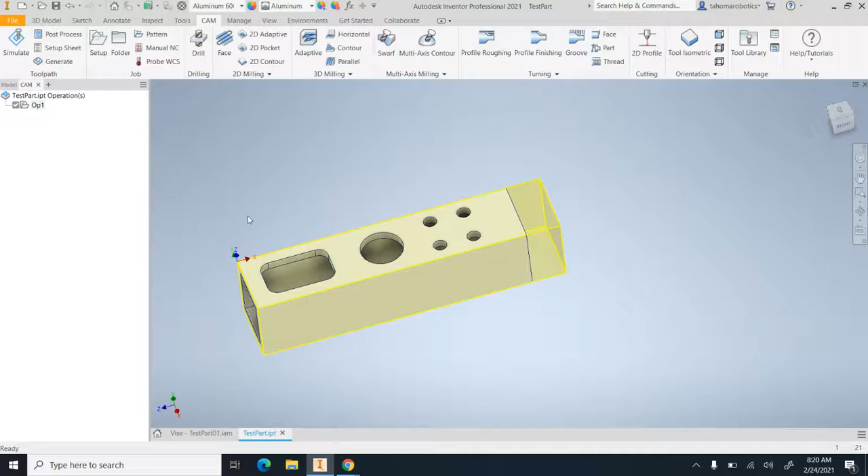In the previous video, I went over how to set up the work coordinate system for this test part that we machined in class, or that I demonstrated for you being machined in class. And so we have the origin here and the x-axis along this side of the piece, the y-axis going back here, and then the z-axis going up there.

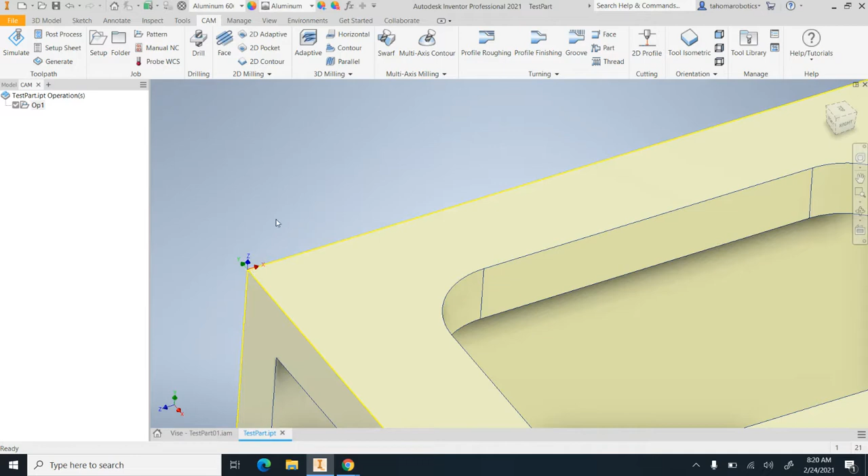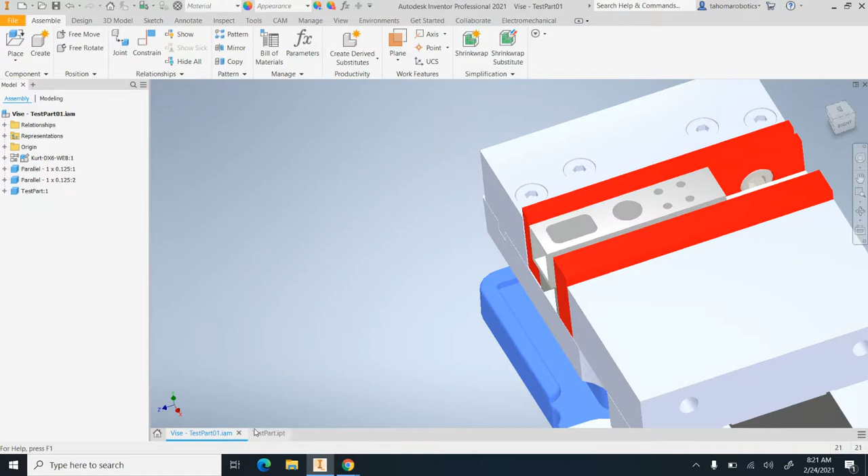Setting up the work coordinate system is the first step before moving on to the actual creation of the tool paths for machining. So now that we have the part held in the vise, as shown here, as you saw in my demonstration, the machine comes down and cuts these different features on the test part here. The features that we have are just this little rectangle with filleted corners, this circle here, and then these holes here.

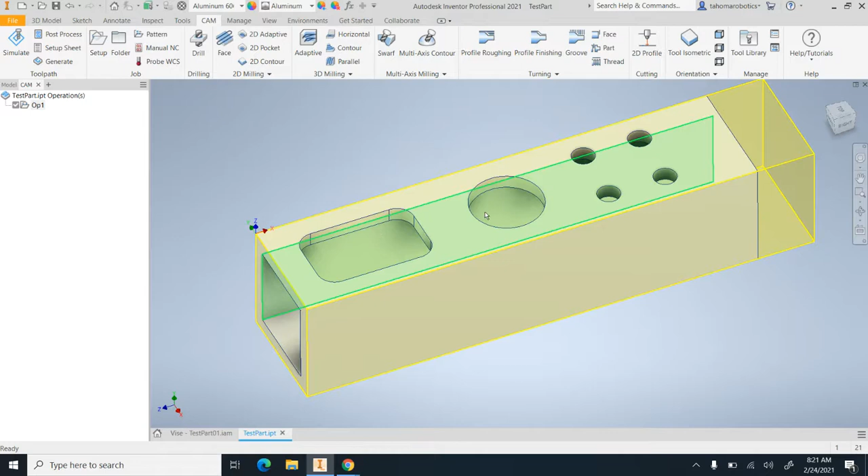The larger features, the rectangle and the larger hole, or the circular hole, will be actually machined out with a smaller cutter, a 1/4 inch flat end mill that we're going to use, and that's what I had done in class. And then these holes are going to be drilled. Often when you see smaller holes like this in the design in the class, they're for fasteners like rivets and screws. You can always check within Inventor to see the size.

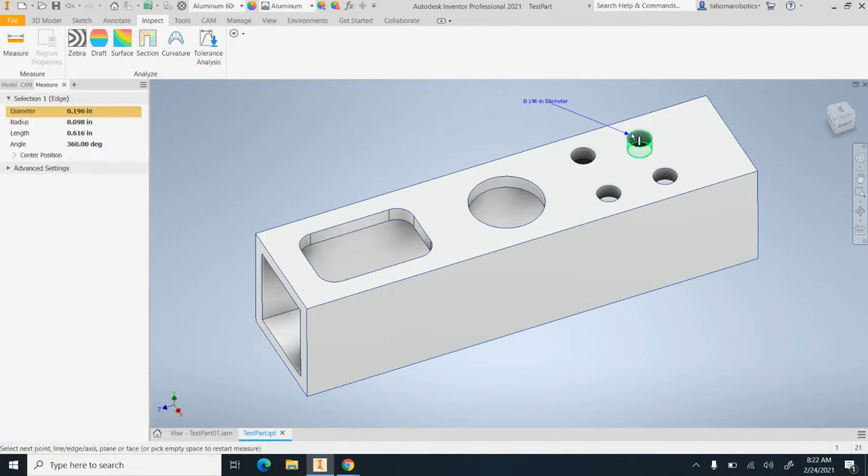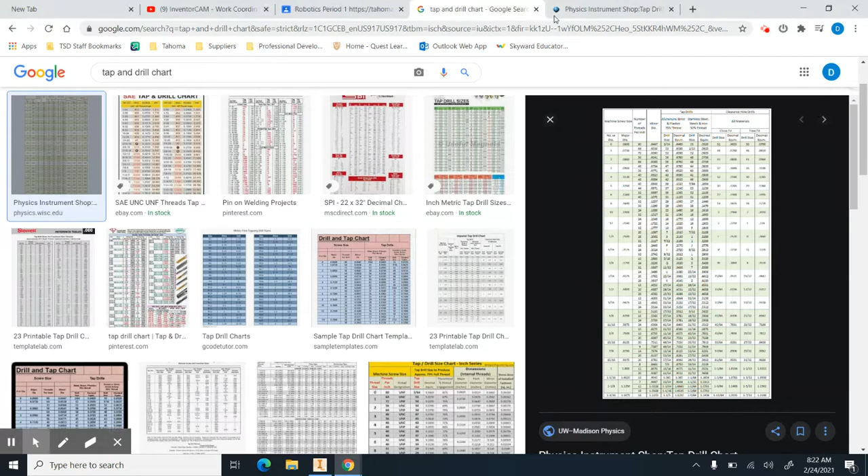So if we go inspect and measure, you can click here and see the diameter. The 0.196 diameter is a very popular size that we use within the shop because it is the size for a number 10 screw. It's a clearance hole. Looking at the tap and drill chart, if we look at a close fit clearance hole for a number 10 screw, it uses a number 9 drill bit, which has a diameter of 0.196. So that 0.196 is a common hole size that we use.

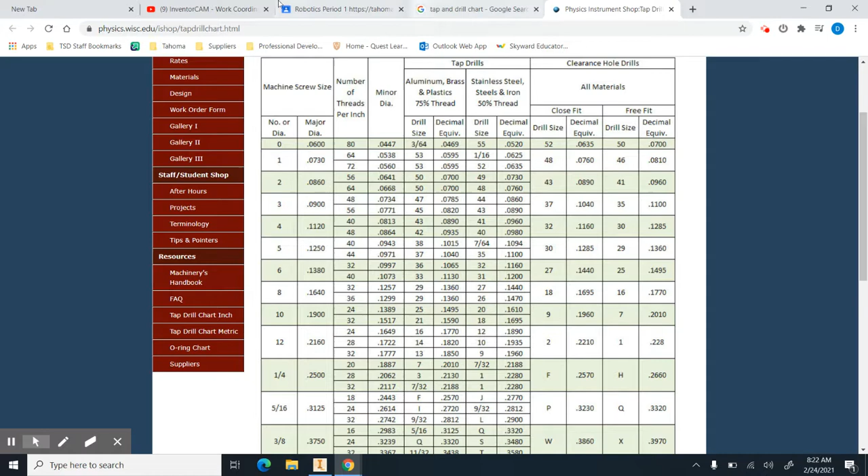It's so common that we have a drill bit in the machine dedicated for that hole size. Whereas these two features will not be drilled, they will be machined with, like I said, a 1/4 inch end mill that will cut away the material. So going back to the CAM tab here, we have our work coordinate system set up for operation 1. And that's what the XYZ is and the origin there. We've set all of that up.

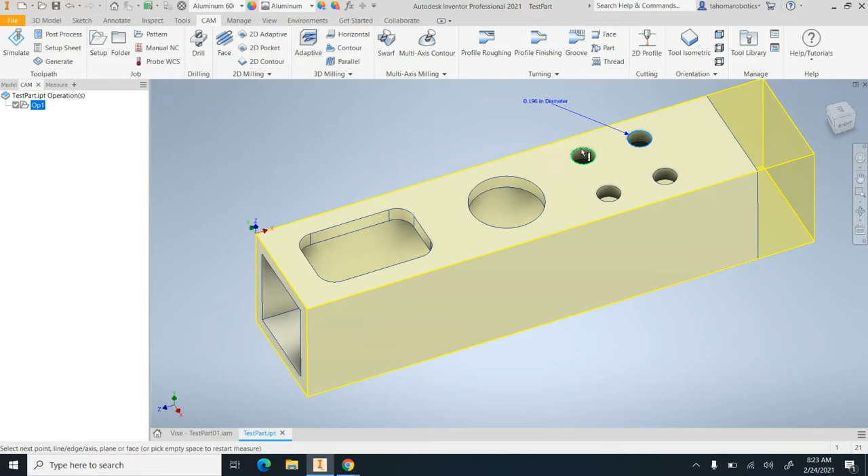And so now it's time to do the steps. So let's first do the drilling operation. I think that's the most straightforward one. We're going to drill these 4 holes. And so we're going to hit drill. The first thing that we want to do is choose a tool. Now, if you've downloaded the tool library that I've made available, you can go and hit here on the tool and scroll all the way down until you see the tool libraries.

Let's do this on the VF3 machine. That's the one I demonstrated in class. And so if we open this up, we get a whole bunch of tools available to us. And it takes a minute to dig through, but if you look at tool number 16 right here, it is a drill bit that is 0.196 inches in diameter. The 135 degrees basically tells you the angle of the point of the drill bit.

But so we have a drill bit. You can see here where it says type, it says drill. This is just information about where it was purchased and things like that. And then here we have a defined spindle speed already. Okay, so when I set up the tool library, I defined the speeds of those tools. And I usually chose a speed that worked well for aluminum.

So if we're drilling something else, we might want to choose a different speed. But for now, at this level of class, we're just going to click on tool 16 and hit select. Now, if you did not get the tool library, what you're going to want to do is go up to inch tools. Maybe you can go inch aluminum and start looking for a drill that is the right size. And you'll eventually find one.

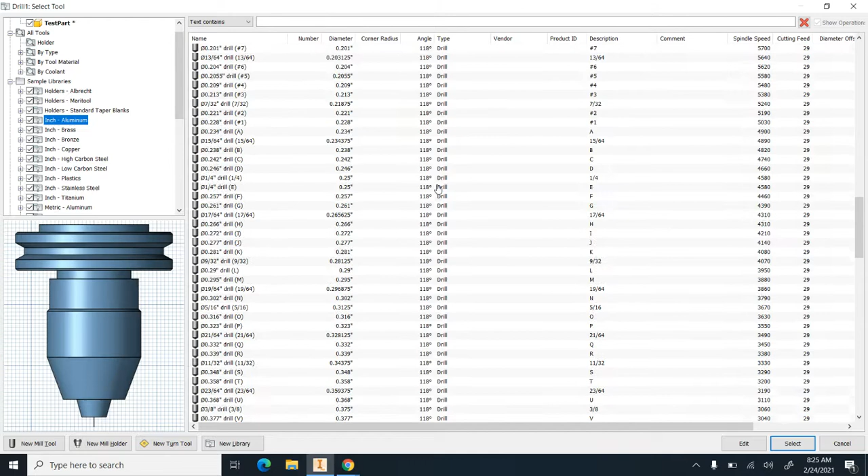0.196 should be in there. Looks like they have 2 to choose from right here. Well, actually, one. I'm sorry. Right there, 0.196, a number 9 drill bit. The tip angle is a little bit different, but that's fine. And you would choose that drill bit. Okay. So for here, choosing tool 16 and going select.

The next thing that I want to do is actually select the geometry of what I want to actually be cutting. Before I do that, I want you to see these speeds. It says feed and speed. This is for a later lesson, and we get more into this in the advanced class, talking about how fast the spindle should be running, how fast it should be diving into the material, and things like that. And so the plunge feed rate is how many inches per minute it's moving downward.

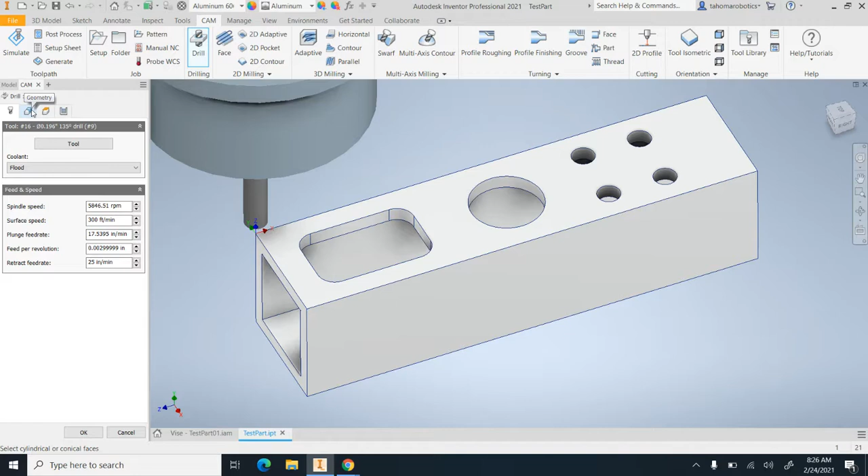And all of these things, again, are a little bit beyond our level, at least this level for a first introduction. So we're going to go to geometry here, and we can actually select the geometry. I can click each one individually, and that's easy enough when there's 4. But notice you can say select holes of the same diameter, and it will just select all of those. And there are more features here, but for us, that's all we need to select those holes.

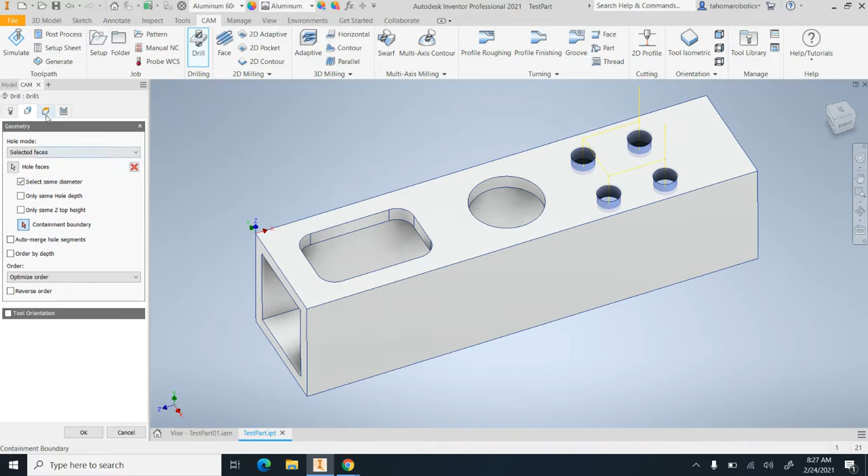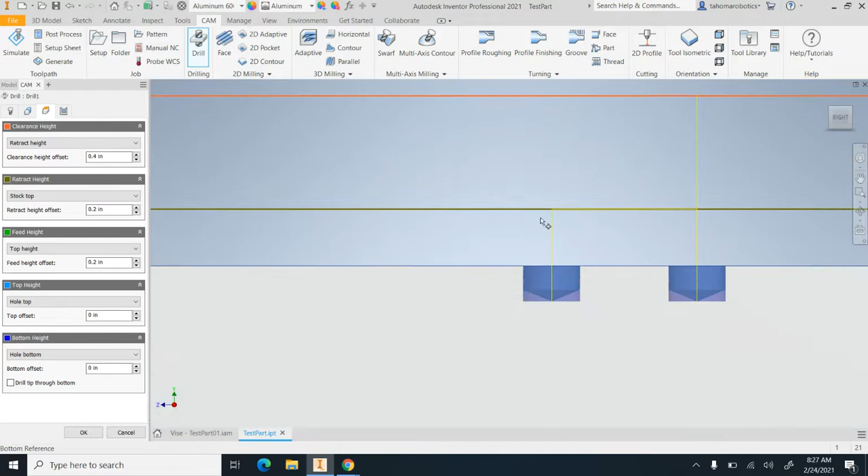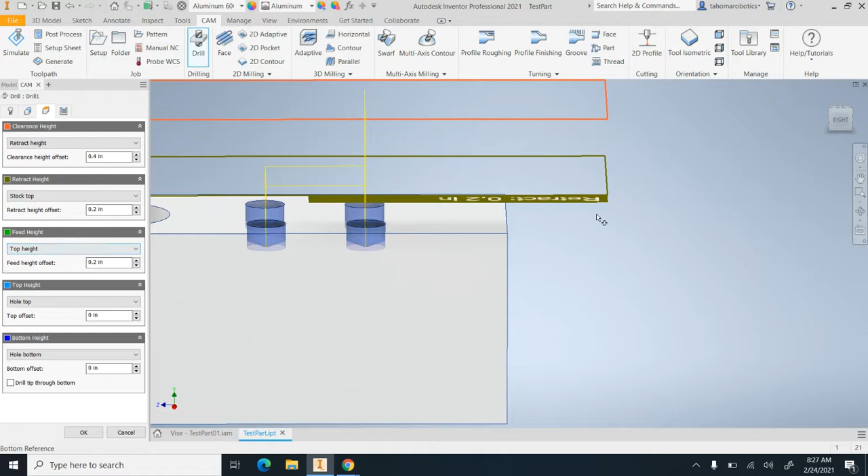And then the next thing is, how deep do we want to go? Well, there's a number of options. You really don't have to worry about, for right now, the clearance height and the retract height. That's how the machine moves when it comes up to move away and above the material. So you can kind of see it's going to drill a hole and then move up to this height, which is the retract height, before it goes to the next hole. It's defined right now as the stock top plus 200 thousandths or 0.2 inches. And typically you can leave those settings as default.

The times when you would change those is if maybe there's something on top of the part, like a clamp, and you drill a hole and you want to make sure that the drill bit comes up high enough to clear the clamp before it drills the next hole. You could then change the retract height and the feed height to increase that distance, as I changed it there. But for now, we're going to leave those settings as default.

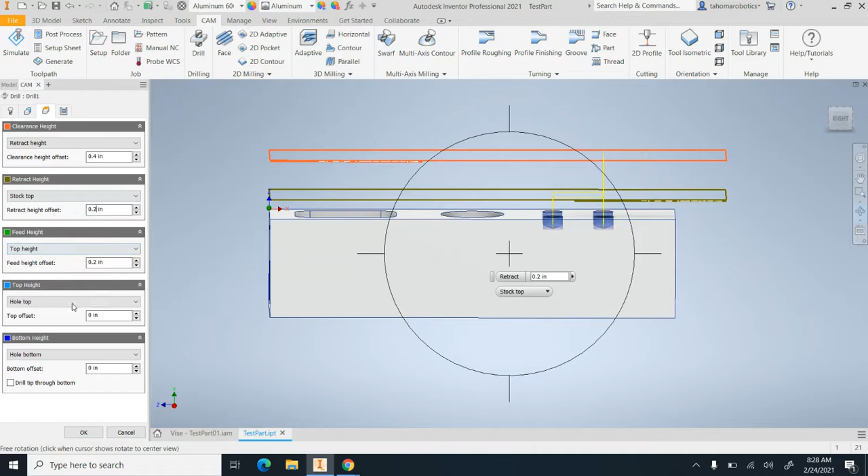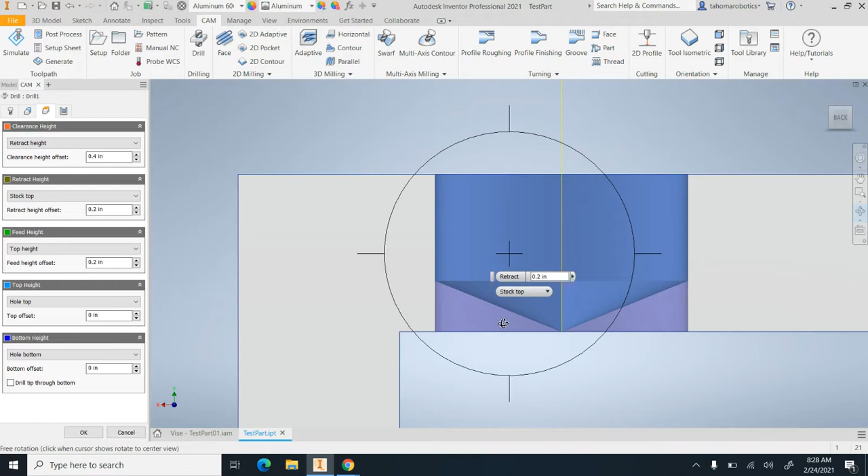The one setting that we do want to change is the hole depth. Right now it says the bottom height is going to be at the hole bottom. But if we look at this, and I'm going to actually turn the piece here, you can see the shape of the drill bit coming in. If the tip of the drill bit goes to the bottom of the hole, it leaves all of this material, and we don't want to leave any of that material. So what you really want to do is click this button where it says drill tip through the bottom, and it ensures that the tip goes through so that the sides of the drill bit make it to here. But then I typically add on an additional distance.

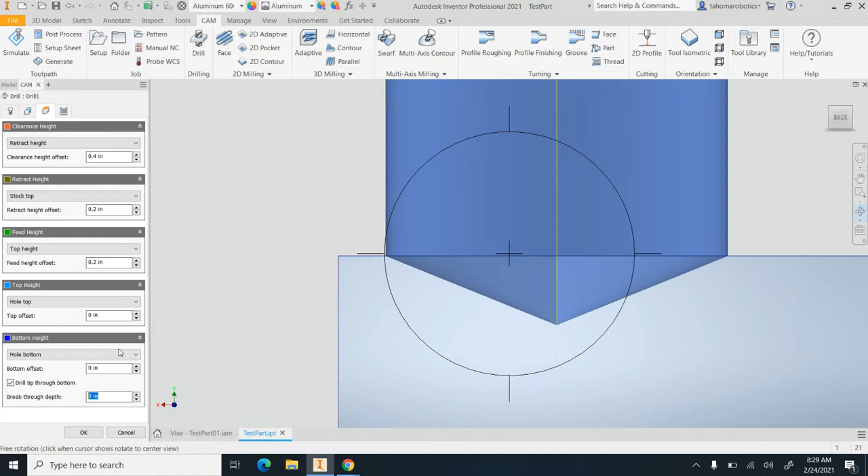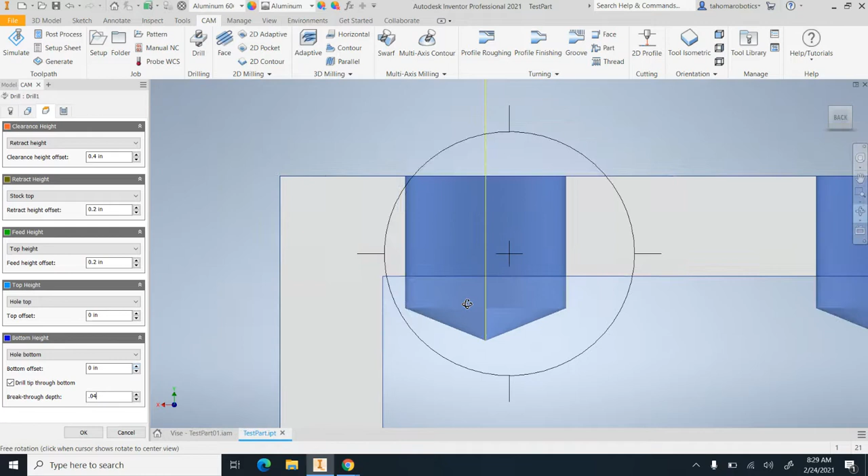Okay, so you can have what's called a breakthrough depth. I recommend, especially since this is a hollow tube and there's nothing below it but air, we can add in a significant breakthrough depth. Typically, I use 20 thousandths of an inch. Sometimes you can go more. Notice if we do 20 thousandths, we're here. We could even go 40 thousandths and nothing is going to happen. So just make sure that you have a little breakthrough depth so you're not having to worry about cleaning that up after it's machined.

So now we have the holes. The holes are drilled with tool 16. We have this here. If you wanted to change anything, you could just double click. You could change the tool, which we don't need to, but anytime you would want to change something, you can.

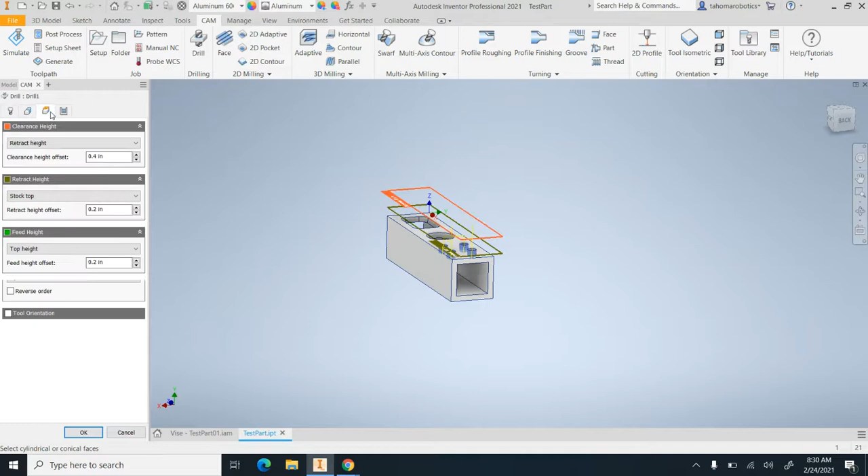The last little tab that I skipped was what type of cycle. And there's many different types of cycles. Since this is such a shallow hole, all we need to do is just punch the hole in and come out. But sometimes you need to do some peck drilling, going in and pulling out so the drill bit pulls the chips out, especially in deep holes. There's a lot of different options here. But for now, we're just keeping this as the default setting.

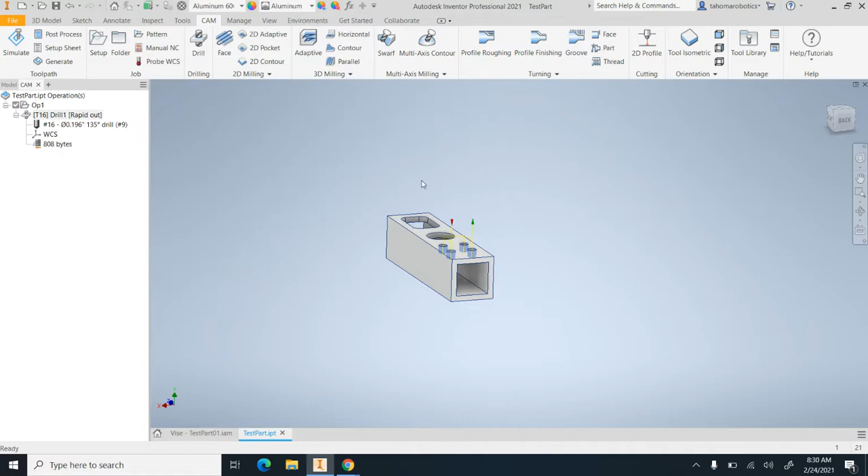Now that that's done, we want to start looking at the other two features. As I mentioned before, we're going to be using a 1/4-inch flat end mill to machine out those two features. I'm a big fan of using the 1/4-inch flat end mill for most of the operations in a class like this for a couple of reasons. One, it's a large enough diameter that you can cut at a reasonable speed. If it's a tiny end mill like an 1/8 inch or smaller, you have to really go slow because you could break it pretty easily. But a 1/4 inch is a large enough diameter that it has more rigidity and you can machine a little bit more quickly.

Also, it's not so large that if we do end up breaking it, it's horribly expensive to replace. A typical end mill of the quality we use in class is in the $20 to $25 range. But if we step up to like a 3/8 end mill, you could machine things much more quickly with that, because it has a larger diameter, it can cut more material, and it has more rigidity as you move it through the material. But it costs more if it breaks.

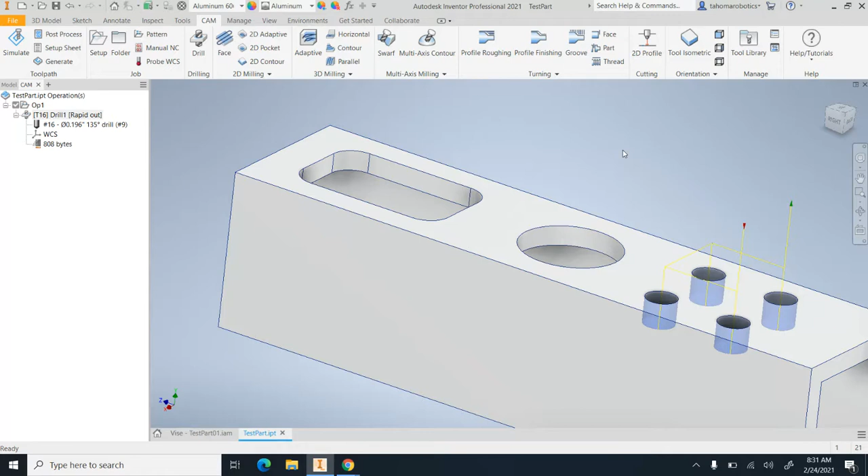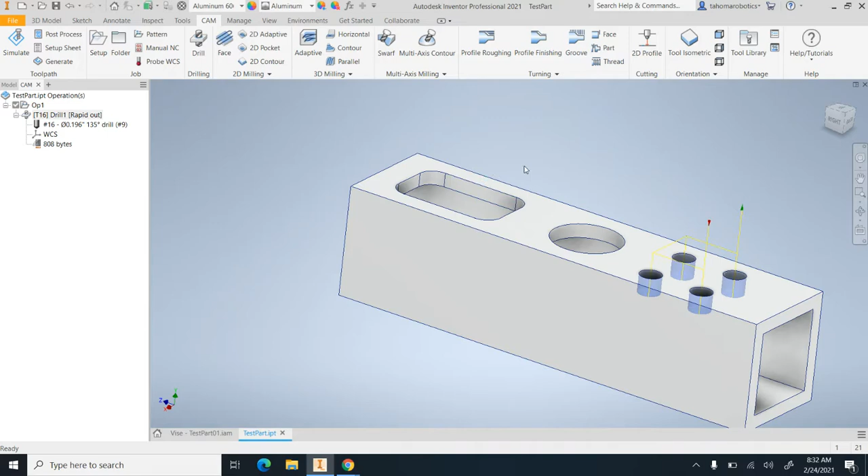And in an educational setting, we really have to worry about balancing learning with cost and things like that. In an educational setting, we are more prone to making mistakes just because we're having so many people learn the steps. And so having a 1/4-inch end mill is a really good default size for us. You'll see me using that a lot, even though we could use something larger.

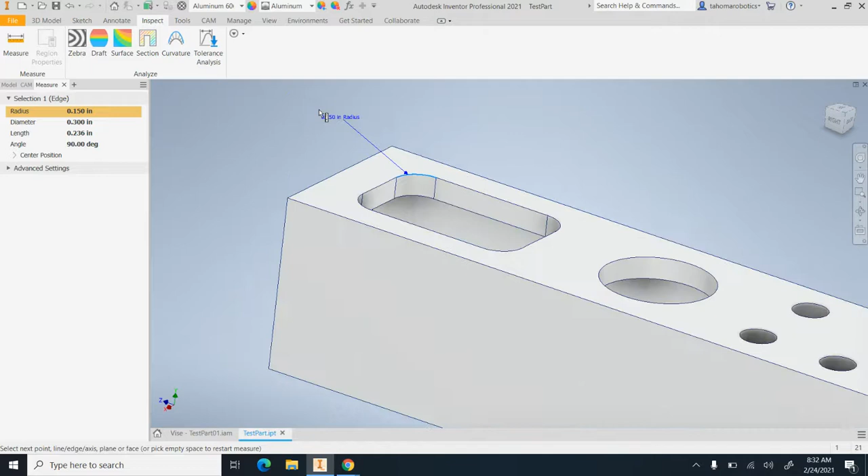So one thing to realize is this corner needs to have a large enough radius so that the 1/4-inch end mill could actually machine it. And if we go inspect and measure that, that has a radius of 0.15 inches. Now, a 1/4-inch end mill has a diameter of 0.25, but that means it has a radius of 0.125. And that is less than 0.15. So yes, the 1/4-inch end mill can definitely hit that radius.

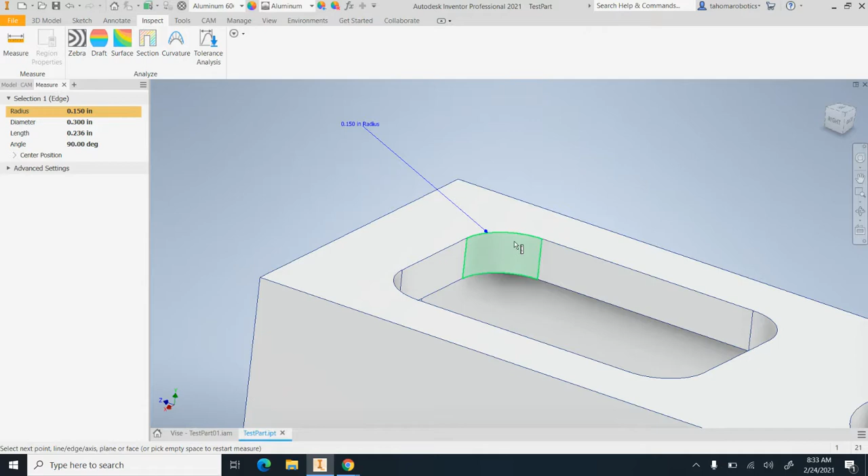Typically, when we're designing parts, we have the designers give something above 1/8 of an inch for the radiuses on their corners. If it is tighter, then we have to move to a smaller cutter to make that corner. Okay, so going back to the CAM tab, now that we've measured it and ensured that the 1/4-inch end mill will indeed work, we're going to click CAM here.

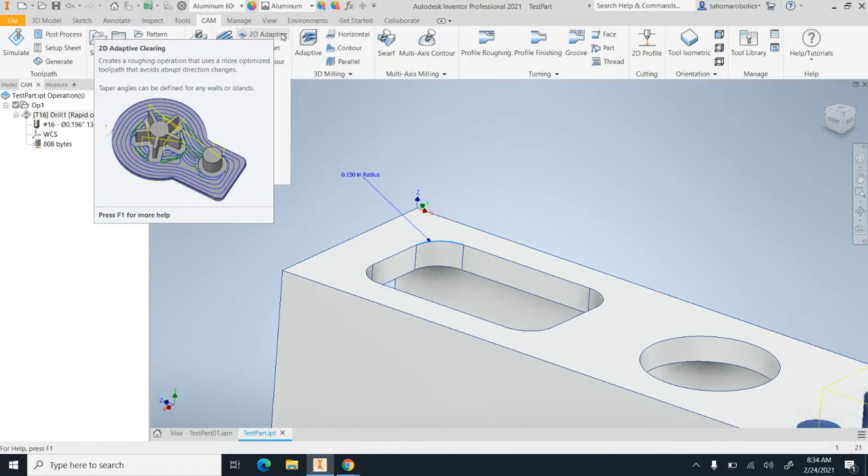Under 2D milling, there is a drop down, but we're just going to use what's up here, the 2D adaptive clearing. Notice it gives a little description. It says 2D adaptive clearing creates a roughing operation that uses more optimized tool paths that avoid abrupt direction changes. Taper angles can be defined for any walls or islands. The walls and islands again is a more advanced part, but for us, we're just cutting away here, and we're using a 2D adaptive clearing.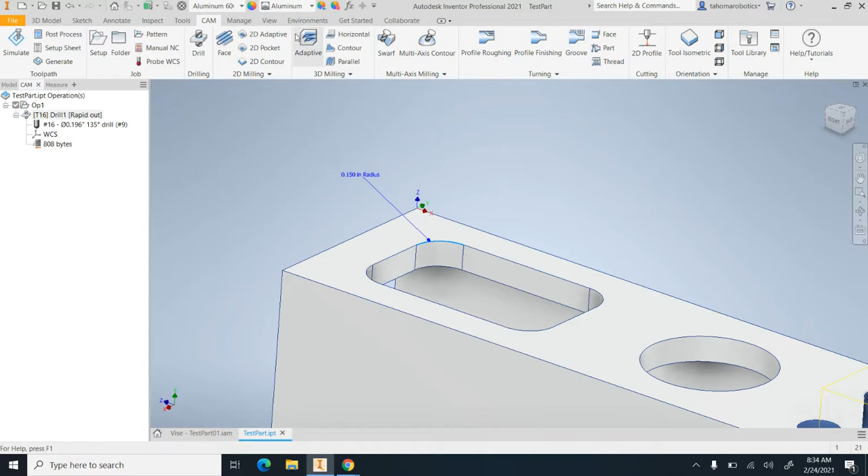Notice there's a 3D adaptive, and that's for parts that have more three-dimensional shapes. Yes, this is a 3D part, but the feature is really just a straight down two-dimensional cut. So we're going to do just 2D adaptive. The tool that we're going to choose is a 1/4-inch flat end mill from the Haas VF3 tool library.

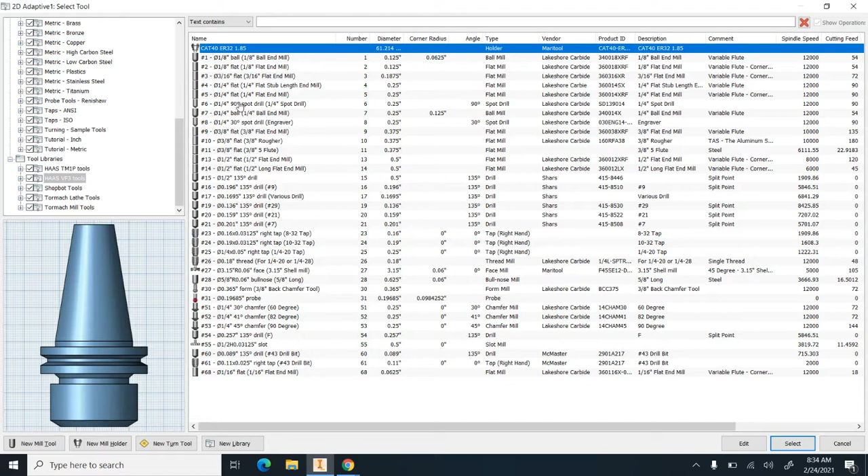I do have a couple 1/4-inch end mills. Notice number 4 is a 1/4-inch flat stub length end mill, and tool number 5 is a 1/4-inch flat end mill. If we look at the difference in the model on the lower left, you can see that the flat end mill number 5 is longer, and the stub end mill is shorter. It's stubby. And the reason for a stubby length is it's more rigid. It doesn't stick out as far, and you can actually machine a little more quickly with it.

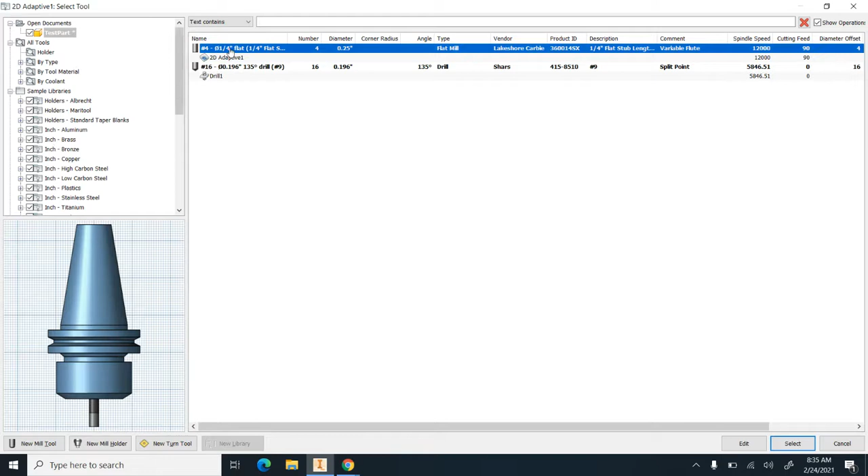And so really what we do care about is how long the flutes of the end mill are. That is defined somewhere over here. Maybe we have to double click and look at the tool itself in more detail. Sorry. Oh, I messed up here. Basically, I was trying to show the actual length of the flutes of the tool. So let me click down here and go edit, and we can look at it there.

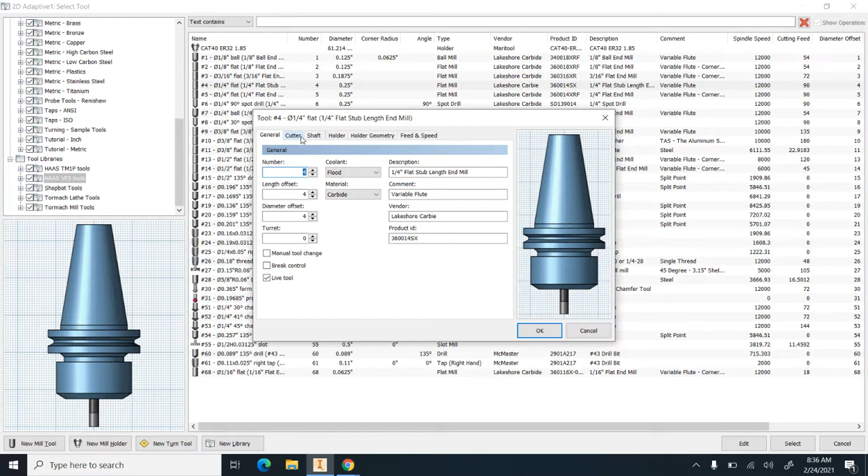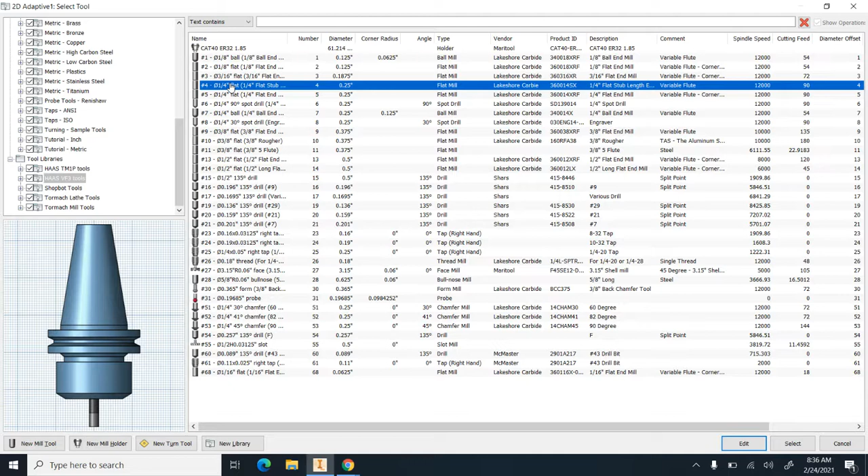You don't have to worry about this too much, but we want to make sure that the flutes are indeed long enough on the cutter for this part. The flute length of this is 0.375 inches, which is 3/8 of an inch, which is plenty long because the thickness of our tube is only 1/8 of an inch. So for most features, I recommend using the stub end mill if it's available in the library. So we'll choose this one and select. If you did choose tool number 5, it would still machine the part.

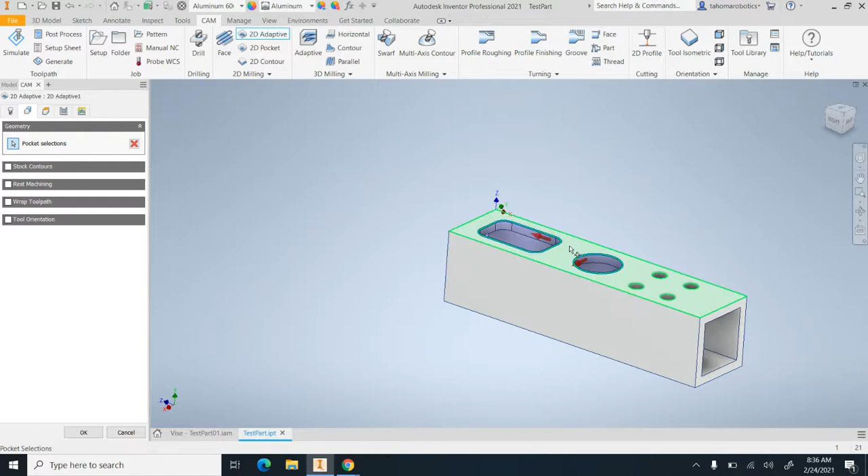Now that we've chosen the tool, I'm going to go to the next tab, which is geometry. I'm just going to select this arc here, and this here. Then I'm going to go to depth. Basically the same concept. Here we have a flat end mill. The difference is the bottom height is currently defined as the selected contours. What we really want is to go below that. So I could choose something else here, or I could just do an offset.

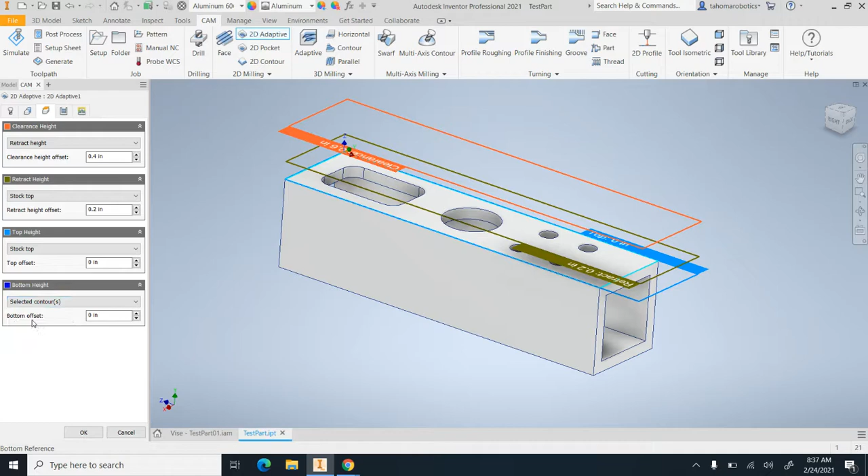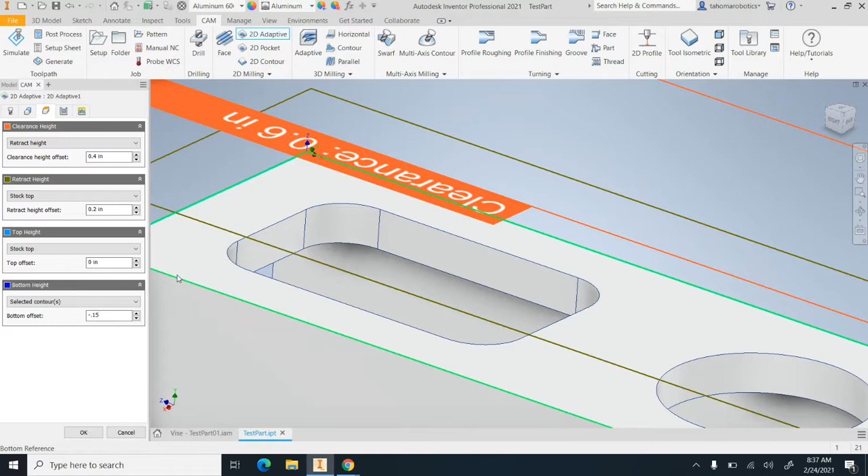So I selected the top. I want to go at least to the bottom plus a little bit of breakthrough. This is 1/8 of an inch thick, which would be 0.125, but I want to go a little more, like another 15 or 20 thousandths. If it was 0.125, I could go to 0.14, maybe 0.145 or even 0.15. There's nothing below it, it's just air, but we're going to put a negative in. So let's go to negative 0.15. That's an additional 25 thousandths of an inch. Then we'll go to the next step. In the next steps, we're not going to change much except the stock to leave.

Okay, this is saying, hey, we're going to leave a little bit of material left because this is what we call a roughing operation. It doesn't leave a nice smooth edge. We're going to come back and clean it up later. So we're going to leave a little bit along the edges, which is the radial. And 20 thousandths of an inch is pretty nice.

But the axial, which is really the depth, how deep we're going, we don't want to leave any. That would change how deep the cutter is going. So we're just going to say no. There's 0 stock to leave in the axial. We'll leave 10 to 20 thousandths of an inch in the radial. Okay, it's defaulted at 20, so we'll just leave that there.

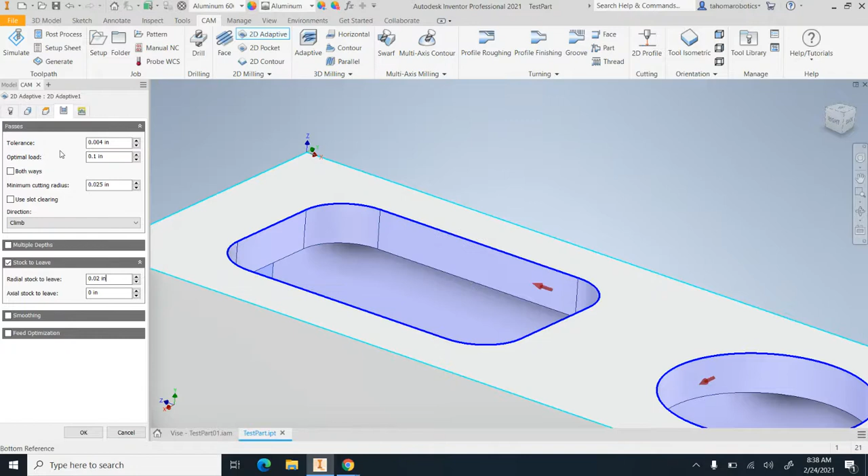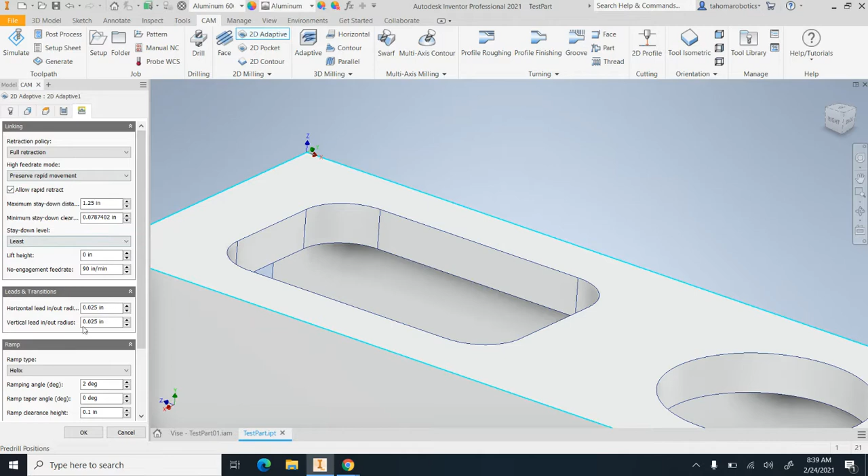Here are some more settings that we'll talk about later in a more advanced lesson. But that basically talks about how the tool enters the material and how it leaves the material and things like that. And you'll see there's a kind of helical entry. That's what this is, the ramp type. And there's lead-ins and things like that we'll also look at. So I'm just going to hit OK. We'll see how this looks.

So you can see the helical entry. The tool enters the part. Notice it doesn't dive into the part just in a straight line. That would really damage the cutter. And so it gently enters the material with this helical path, and then it goes down and cuts the material, comes back out, and does the next part. But it's going to leave 20 thousandths of an inch around the perimeter.

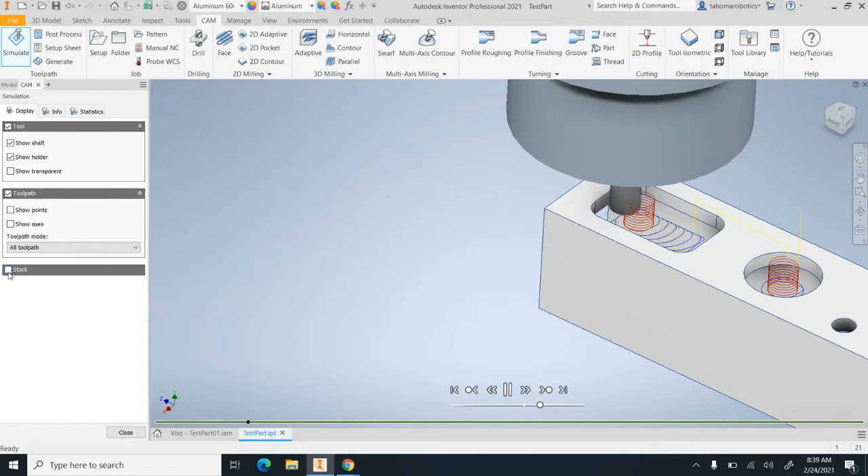You can see that if I hit simulate. We can go over here and simulate what's going to happen. You can actually show the stock material too. You can see it's digging into the material, and then it's using this adaptive strategy to clear out the material. Okay.

So now that we've done this, the next thing that we want to do is come back and clean up these edges. And there's a couple ways to do that. We're going to use what's called a contour, and we can click 2D contour and select the actual geometry and do that.

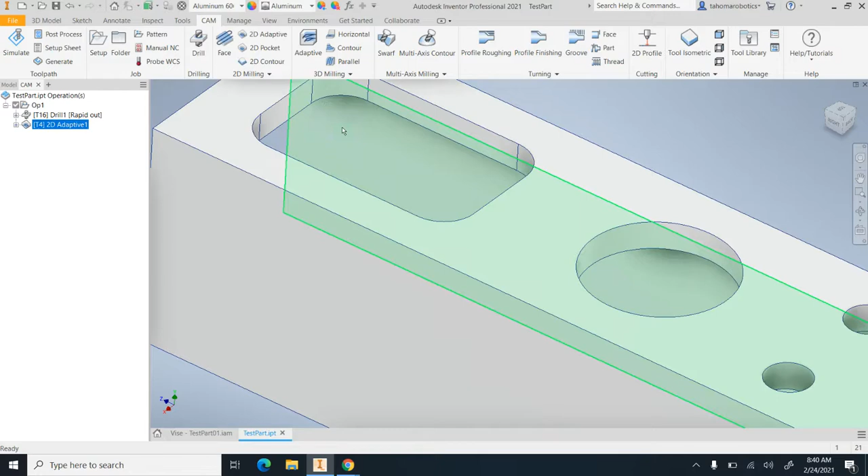There's another way, which is still using a contour, but let's say we had 20 different features we selected, and we didn't want to have to reselect all 20 features. For 2, it really doesn't matter. We have the rectangle and the circle. But let's say we wanted to save some clicks. We could actually right click and go down here where it says create a derived operation. And we can go to 2D milling, and we can go to 2D contour.

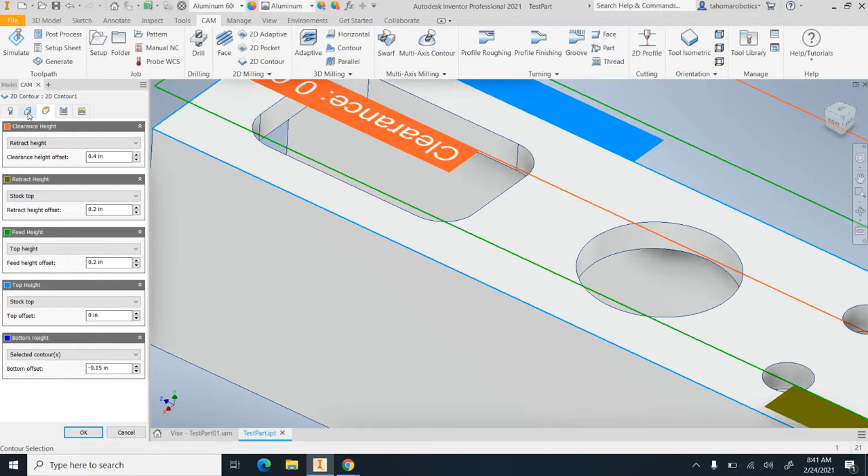And what that does is it keeps the same tool that we used, it keeps the same geometry, and it keeps the same depth. So it keeps all of those things for us. And in fact, that's what we want to keep. We're going to keep the same geometry, the same depth. We're using the same tool, except now we're just going to follow the edge. A contour is just following a line to make the cut.

Now, the one thing that I do want to point out, and I don't think we're going to change anything, is you can repeat the pass. So let's say you wanted to ensure that it's really smooth. You could actually go over it again. And so you could have multiple passes to make sure that you're cleaning up the material. And maybe there's a whole bunch of material in the width that you have to cut off in the radial direction. You could do that in steps. Again, that's for a different lesson, different week.

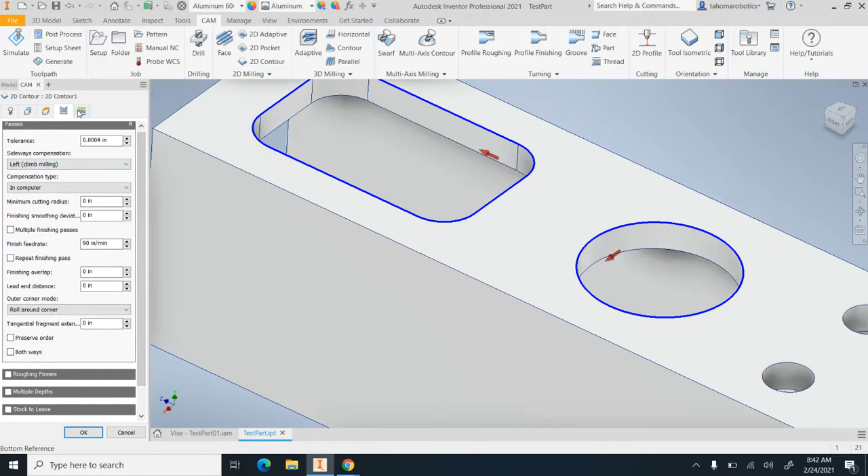But I just want to point out also the lead in. Notice these features. You have a lead in radius, a sweep angle, and a linear lead in distance. We're not going to change any of those things. Typically, the default settings here are going to be fine, but I want to show you what that actually does. So I'm going to hit OK.

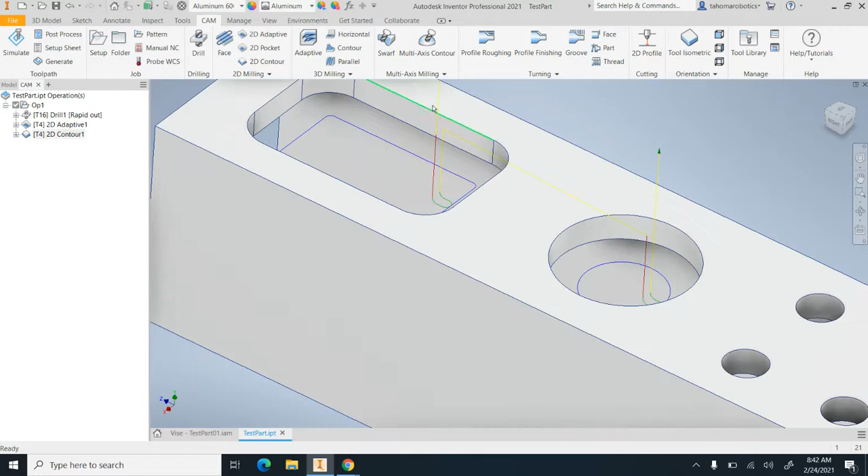You can see that the tool doesn't dive right at the edge. It dives away from it. Then it leads in with this little arc, and then it goes all the way around, and then it leads out with this arc.

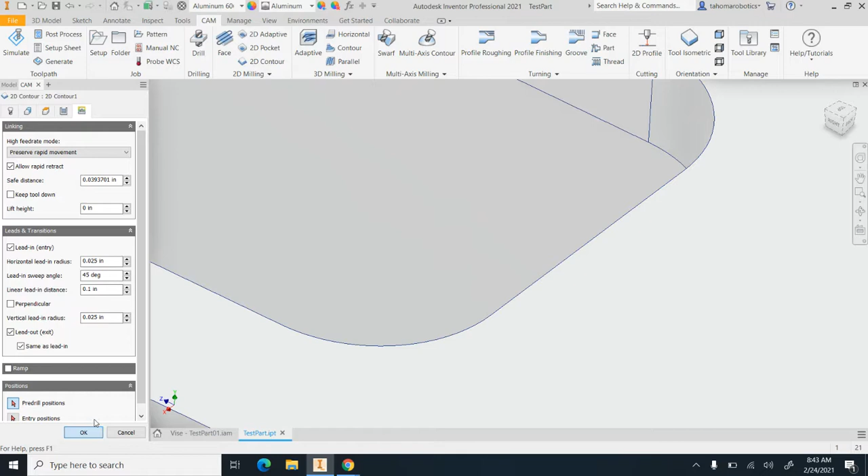And so if I go back here and change some of these settings, maybe I want to change the angle to 45 degrees, and hit OK. You can see that it's now coming in at a 45-degree angle. Okay, so that's what those settings do. And I can also change the linear lead in distance to 0.1 inch. Okay, and now it comes in, has this arc, which is a lot longer than it was before.

Okay, so that is what those settings are. And sometimes we need to play around with them to get them the way they were. So I'm just going to leave that at the default. I think this was 0.025. Notice this is just the lead in, but I have the lead out the same as the lead in.

But if you didn't want it to be the same, you could actually define your lead out, how the tool leaves the material, to be something different. So I can hit OK. Now we've gone and we've cleaned up the material that we left before.

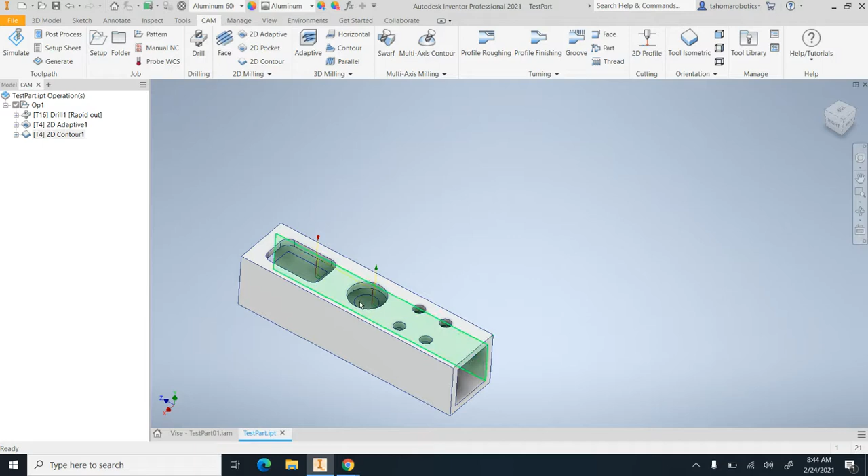Okay, the final thing that I want to point out is the actual cutting off the end. So if you remember, when we cut, the stock goes a little bit longer than the actual part. And so what we want to do is cut the part to length. And we're going to do that with a contour. So I'm going to hit 2D contour. Notice I'm not creating a derived operation because I'm not using the same geometry and stuff. But I'm going to do a 2D contour.

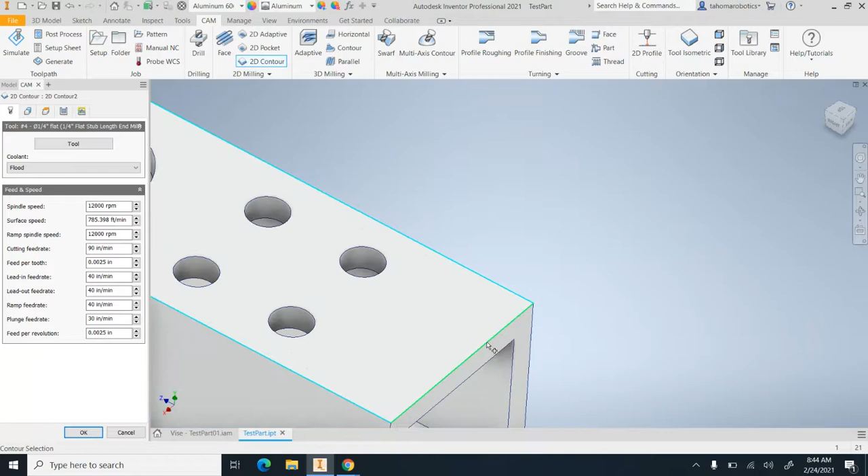And then I'm going to select this edge. But before I click the edge, I'm going to hit Alt and then left click. And that just selects this edge. If I don't do that, notice if I go to contour and just click the edge, it goes all the way around. I don't want to do that. So I'm going to clear the selection, hit Alt, left click, and then that gives just this edge, because I just want to come and cut this edge.

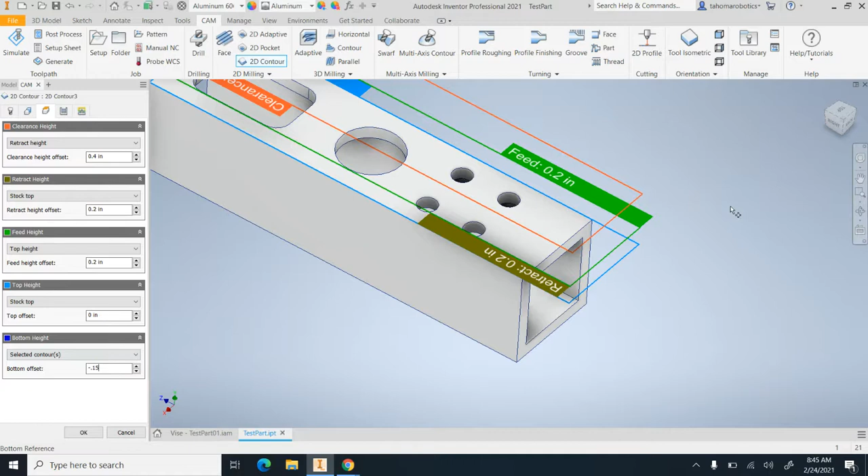The tool I'm going to use, notice it keeps the same tool that you used in the previous operation, which is what I want, the 1/4 inch end mill. The depth, same settings. I'm just going to go negative 0.15, or 150 thousandths down, because I want to make sure that I go all the way through the 1/8 plus a little bit.

The two things that I do want you to change is, one, the cutting feed rate. When we're cutting this way, we're cutting the full thickness of the material. We're making a big slot, and that's a lot of force on the cutter. And for just a good rule of thumb, I'm just going to have you cut the feed rate, or you could just half the feed per tooth.

Again, we haven't gone over the details of these numbers, but this is how fast the tool is moving through the material, at 45 inches a minute. And that really is determined by the speed of the spindle, how much material you're cutting per tooth, and things like that. But if you just change the feed rate, it changes the feed per tooth for you. So just as a good rule of thumb, anytime you're doing a slot cut with any of our cutters, just cut the speed in half.

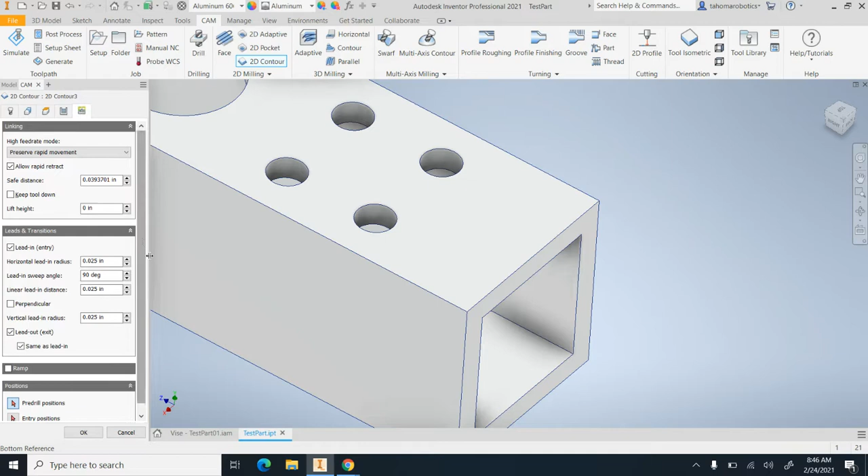The final thing is under the lead ins. If you remember the curved lead ins, if I just hit OK and kind of see what's going to happen, if we do a top-down view, you can see that the tool dives in here and then spins around and then comes out. What's happening though is that the tool's diving into material, because the material extends out. And so I don't want you to ever do that.

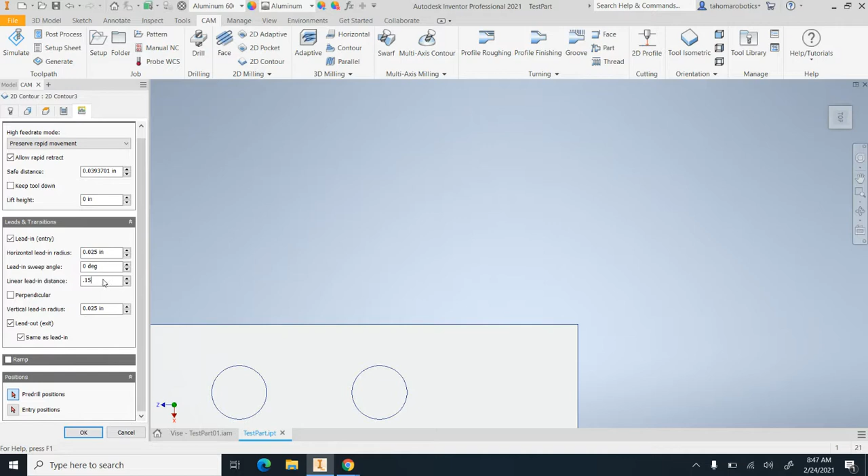And so what we're going to do is, under the linking tab, we're going to change the angle to 0, and we're just going to increase the linear lead-in distance to 0.15. I'd prefer it to be larger than the radius of the tool, and the tool is 0.125. So I'll just go 0.15. We'll take a look at it. Again, the exact numbers aren't that critical as long as the cutter is safe.

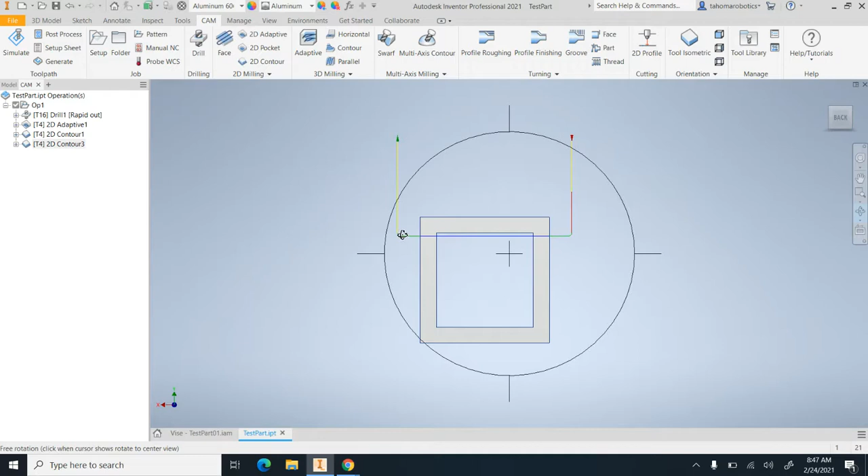And so let's take a look at a simulation. So here is a side view. You can see the tool is going to come down, go through and cut, and then come back up. If I have this one highlighted and simulate, we can see that the cutter is not diving into the material. It's a safe distance away. And then it goes through and comes up. So now we're left there. And so that's the slot cut that I was talking about.

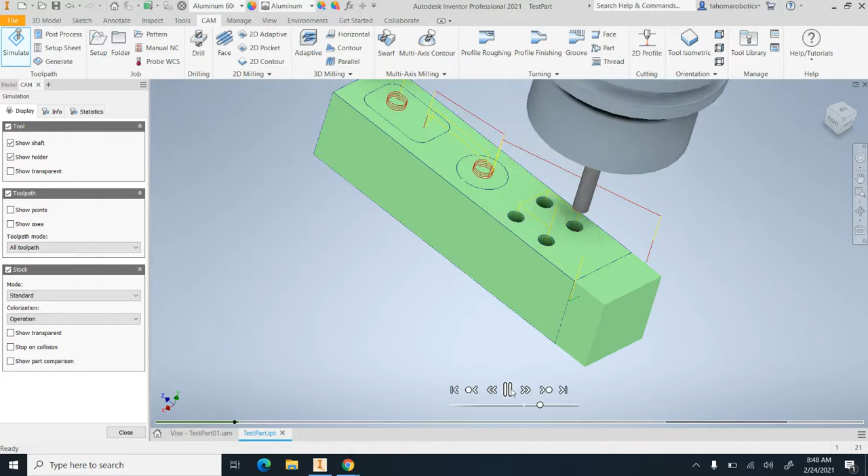So now what I can do is select the entire operation and go simulate. And we can see everything. The drilling, the helical entry into the adaptive clearing. You can see that it's leaving a little bit of material along the walls that it will come back and clean up with the contour. So now we're coming in with a contour, cleaning it up, and then we go to the end and do the end cut.

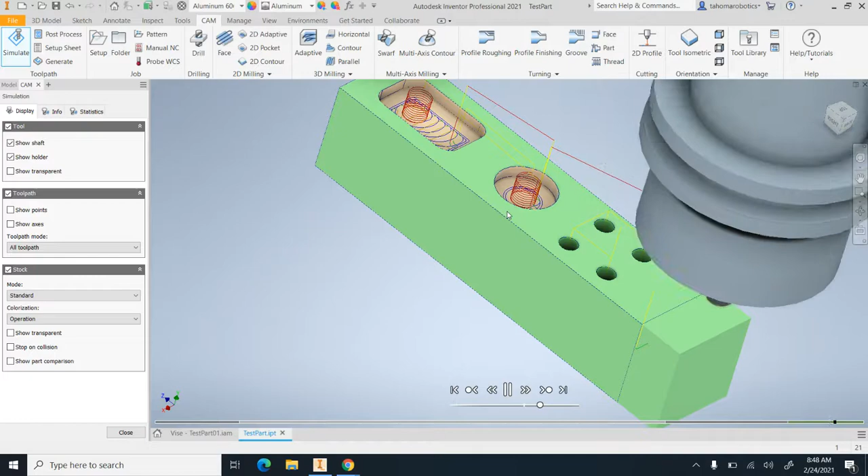We'll talk in later videos about how to actually create the code for the machine.